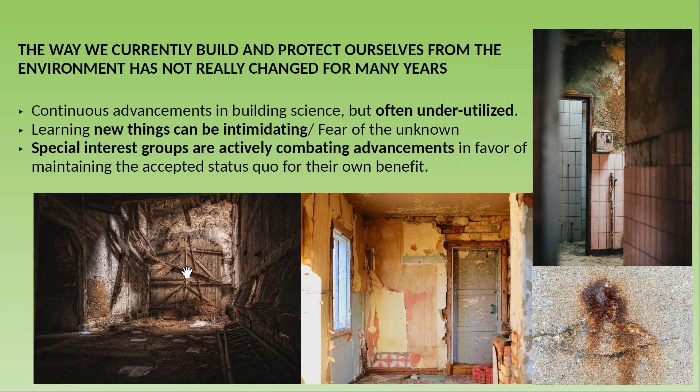This is something near and dear to me. When you think of where we build today, we build where it was once a forest or grasslands. And what do we do? We build with the exact same materials we just took from that environment. Then we expect those materials to survive when a forest fire or storm blows through. Same in coastal environments - we're building there, especially today with more storms and issues occurring, and we still keep rebuilding the same way. If you think of the most recent fire in Colorado, all houses built where it was once forest area, over 1,000 structures gone in 48 hours. So we have to change the way we do it and stop repeating this madness.

When we talk about the construction industry evolving, what we've really done is create tighter envelopes and more insulation values, but we really don't address toxic materials and flammable materials as much as we should. That's very evident in the issues we keep seeing. We're pushing 2x4 upgrades to 2x6 for better insulation values, which is great because it helps save on energy consumption - a big CO2 producer. But what we end up doing is adding basically 50% more fuel contribution to a fire, so there's more to burn, and we're taking down more trees. So again, we just continue that same madness.

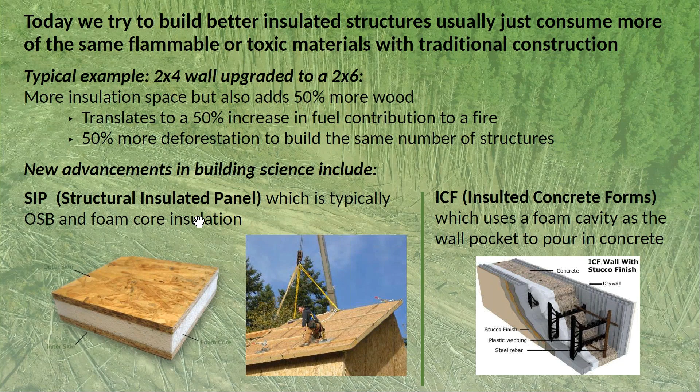So then we look at personal protection, and again, no real changes there. If you think back to Viking times, we used wood and steel to protect ourselves, then Middle Ages armor, and today we have metal shields. Not a whole lot has really changed in any of these industries. We've added Kevlar and aramid fabrics, but they're no good against armor-piercing rounds or edged weapons, etc. So we have to stop putting lipstick on the pig and really evolve into something for both building capabilities and personal protection capabilities that changes the way the industry focuses today.

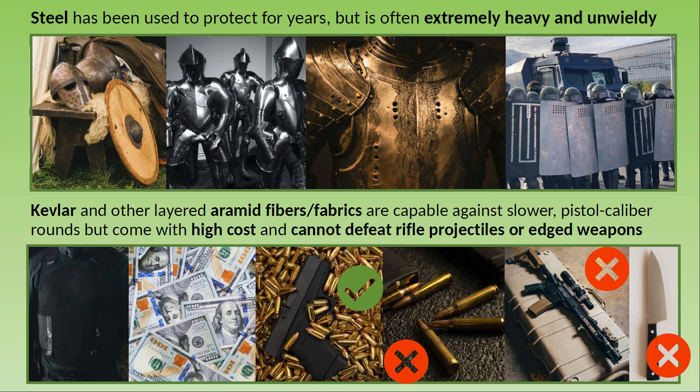So, talking about a new, efficient way to build along with ballistic protection - it has been developed, we have developed it. What you really want out there is a non-toxic environment. People don't want to live in a toxic environment, and many houses today have toxic materials in them. We also want a structure that survives Cat 4, Cat 5 hurricanes, survives seismic zone 4, no mold, no mildew, and works in all environments. We don't just focus on a cold or hot environment - we need insulation values in every environment, and the product can perform in all of them.

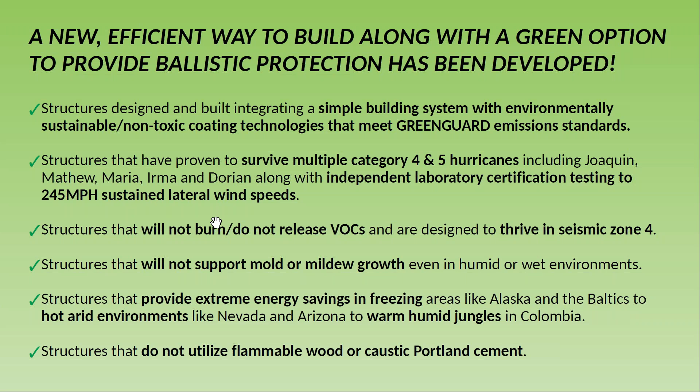So, a system which is faster to build and construct than wood or masonry - that's really what we have to look at today. With labor constraints in the marketplace and fewer trade schools today, meaning fewer people in the industry, we need a product that can be built with low-skilled labor, with high insulation values, and minimal brain freeze when it comes to laying out a house and getting it all set up. You're combining non-toxic ingredients with the strength of a structure that can survive a Cat 5 hurricane or a seismic zone 4.

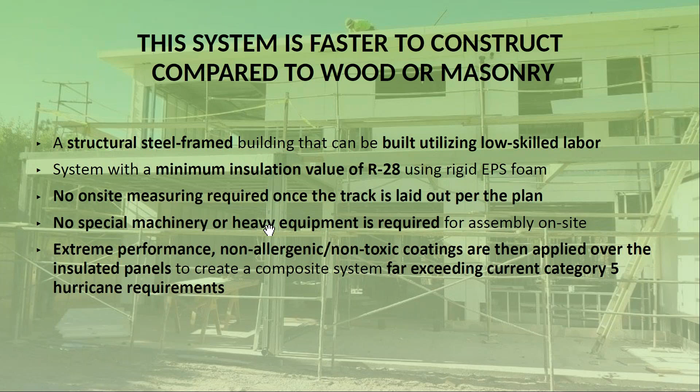If you take EPS foam, as we all know, like a polystyrene cup, if you have a polystyrene cup which is say 1/8 of an inch or less thick, it will keep your hand from a scalding hot drink, and it will also keep your hand from a very cold drink. So if you take 6 inches of EPS, all of a sudden you've got a phenomenal insulator.

And if you take that 6 inches of EPS and make it into standard sizes and standard shapes, it becomes very easy, basically like a Lego block, to build a structure. If you engineer it along with the right gauge steel studs and accessory holes within the panels, now you've got places for anchoring down to a foundation, running electrical chases, etc. It becomes very simple to build and doesn't require a high skill set.

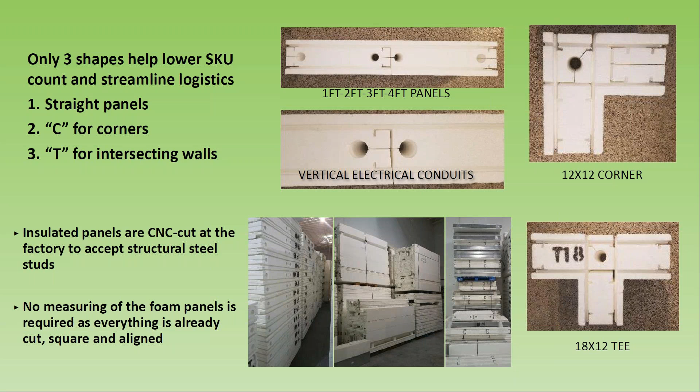What we try to do is lay out any structure, whether it's a house, commercial building, fast food restaurant, etc., with standard components. Here you can see how we take a structure and drop a corner into each section, and then drop a T. Top right-hand corner, you can see a 1 foot by 1 foot corner, which is 6 inches thick, giving you a 6 by 6 interior leg. Then you come across and see a T for an intersecting wall. So now you're not hunting around a job site for all different parts and pieces. There's one size T, one size corner, and then 4 foot, 3 foot, 2 foot, and 1 foot flat panels. It becomes very simple to design a structure and very simple to erect it.

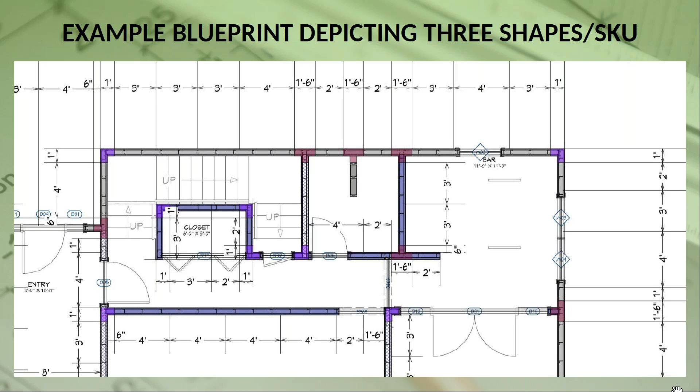It's basically, like I said, like Lego.

The foam shapes just drop over a bottom track, which is anchored to the ground and has a gasket on it. So the foam actually snugs up against the bottom of the slab or the edge foundation, and air infiltration is the big issue. By having a foam gasket and the foam coming all the way down, this really helps prevent that.

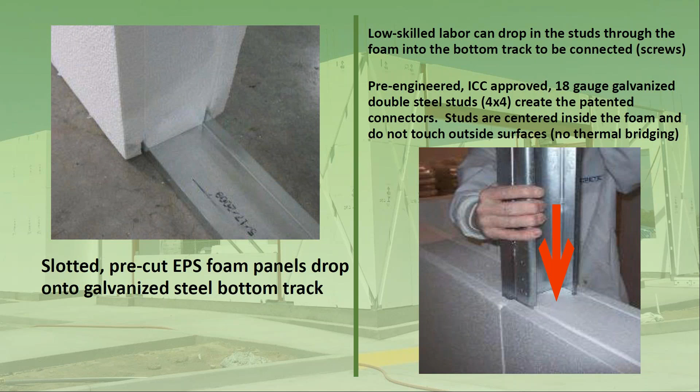And then we just take low skilled labor and drop a double stud connector connecting two foam panels together. As you can see there, that steel is not touching the outside at all—it is buried inside the actual panel itself.

Then what we got to look at is how do we anchor that structure down to that slab. The simplest way to do that is just take a piece of all-thread on a coupling nut on a bolt that is already in the foundation at a predetermined place, and then we crank it down. We take a bracket off of that top, put the whole unit in compression, and bolt that to the roof. When we do that, we've got a structure which can survive a Cat 5 hurricane.

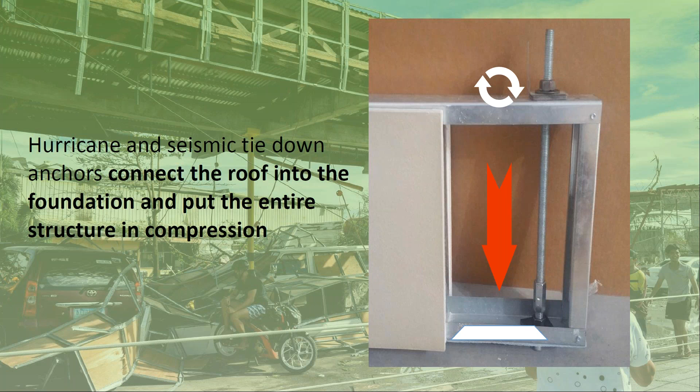When we look at that type of structure and efficiency, you can see here a really good cross section showing how foam buried within gives you a 50 to 60% energy savings. If you look at the US Department of Energy chart on the right-hand side, a typical home today, 2x4 construction R13, falls in a band of around 100. A typical energy efficient home using 50% more lumber, meaning 2x6 R20, actually falls in the 70 to 77 range. A structure built with this type of methodology falls in a range of 2.

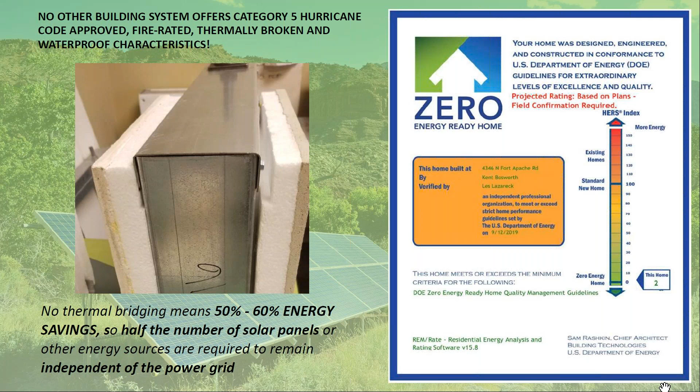So the energy used to heat, cool, and power is greatly reduced, which obviously is a big savings—a savings when it comes to the carbon footprint that a house puts off.

Everybody asks the typical question: well, how would you run plumbing? How would you run electrical? Again, all very simple. For plumbing, just using a hot wire knife, you bend it around the plumbing, whether it's hot, cold, or vent pipe, and literally just melt the foam away. Put the plumbing in, and now all you've got to do is spray foam over it. So your hot is insulated in the wall, your cold is insulated in the wall—your plumbing doesn't get hot in the summer, doesn't freeze in the winter.

For electrical, the same hot wire knife just cuts out for a box, and that box aligns perfectly with those holes you can see alongside each stud. So no matter where you are in a structure, there is a location to run electrical wiring.

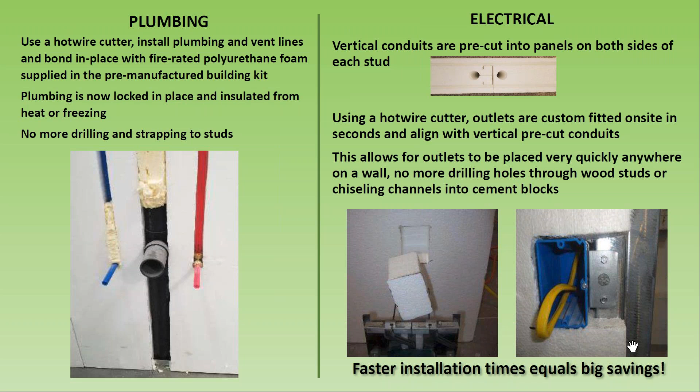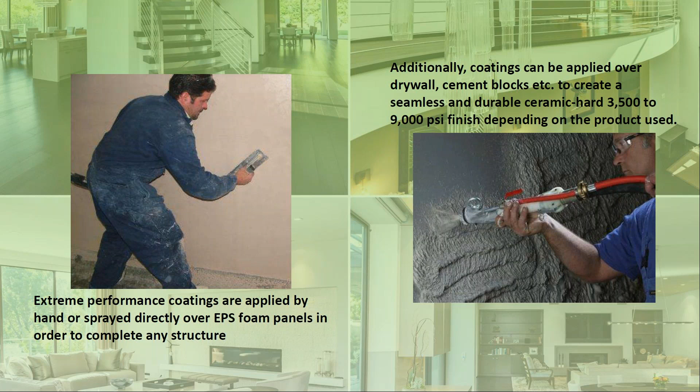So once that is all flat, shaved off and nice and smooth, the simplest thing to do is put an extreme performance coating over the top. By applying this, we don't have mold or mildew to worry about, and we have a seamless finish throughout the entire structure. The product could be sprayed or hand troweled, so it's very simple to apply. In fact, even homeowners have applied these types of coatings, so it's not a difficult process.

Continuous testing is also important. When you look at testing, code approvals, and things that are going to last in the environment, you have to do continual testing. Whether that's heat testing to make sure the material doesn't expand and contract, like 193 degrees on surface temperature in the top left-hand corner, to water intrusion by building a water column test with water sitting on the surface of a coating to see how long it would take to penetrate. These types of things are incredibly important.

Testing against salt water and salt air is important, because that is incredibly corrosive against all materials. Direct flame with no smoke and no off-gassing is also incredibly important, getting to high temperatures as you can see there, 1,787 degrees Fahrenheit. So these types of things in continual testing are incredibly important when you want a product in the marketplace that is going to perform for a very, very long period of time.

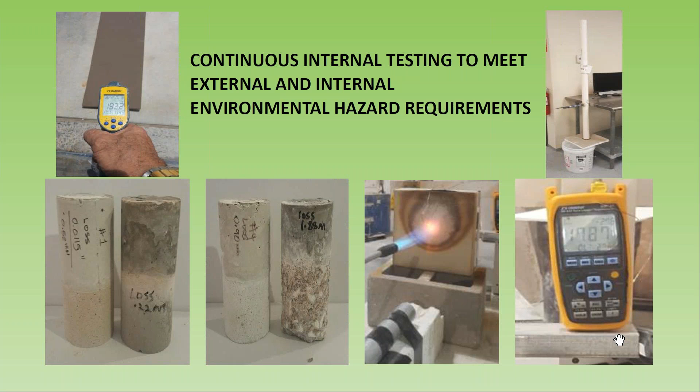So with StuccoMax, when you look at a structure, you saw the foam and the steel studs that are all in place. Then we have to start looking at how do we encapsulate it, so that testing I just spoke about is incredibly important. You need a high performance coating on the exterior.

Today, in the world of stuccos, you have your typical 3-coat stucco and your synthetics. They don't keep water out, and there's multiple lawsuits for mold, mildew, etc. You need high impact resistance, something that is literally going to stand the test of time, whether it's in the islands or in a freezing environment.

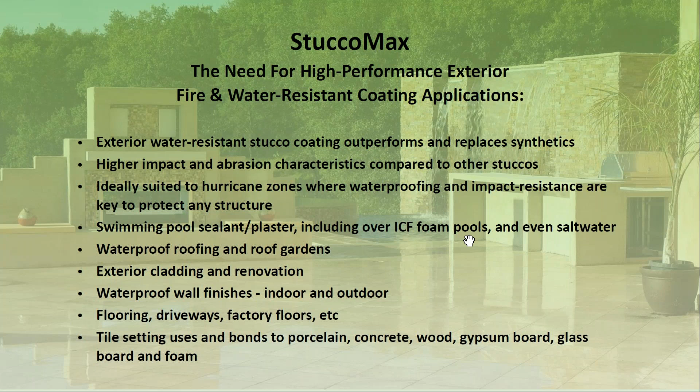You also need an interior fire rated product. I'm going to bounce through some of these because of time, but you need a fire rated product for the interior, and we've developed a product called PlasterMax, which is all natural with zero VOCs, perfect for the interior finish of any structure.

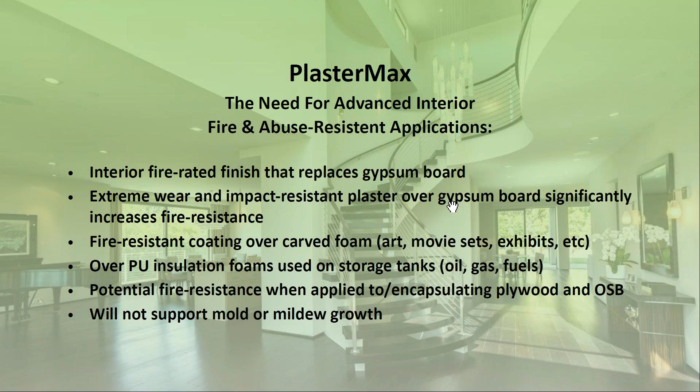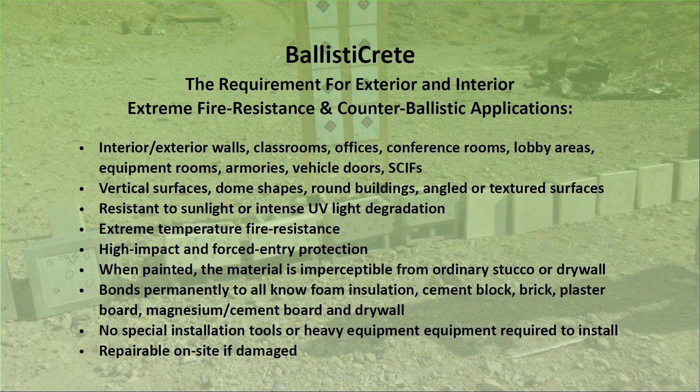And then next, coating BallistiCrete. We developed a bulletproof plaster that can be applied over any surface, block, cement, walls, drywall, etc., that could stop really pretty much anything you could throw at it. We've even done blast testing.

You can see here a few pictures of coating over drywall, coating over CMU block, and coating over different types of finishes. We've gone all the way from 12 gauge slug to tungsten penetrating rounds. In fact, we did test a 308 tungsten penetrating round over a hollow block and actually broke the bullet in half. The people witnessing that, including Seth, were amazed that we were actually breaking tungsten bullets apart. And it's incredibly cost effective.

People just believe you're applying a plaster over a surface and doing an interior upgrade, when the reality is you're providing high level ballistic and fire rated protection.

Same materials can be blended together and actually cast to make stackable blocks. So now we can have a stackable block for different fighting positions, FOBs, etc., around the world. Once you're finished using it, you take it down, stack it back on a pallet, and take it with you. You're not leaving things behind for anybody anywhere in the world.

It can go on grass, sand, concrete, any type of finish. Level it out, stack it, and you're ready to go very quickly.

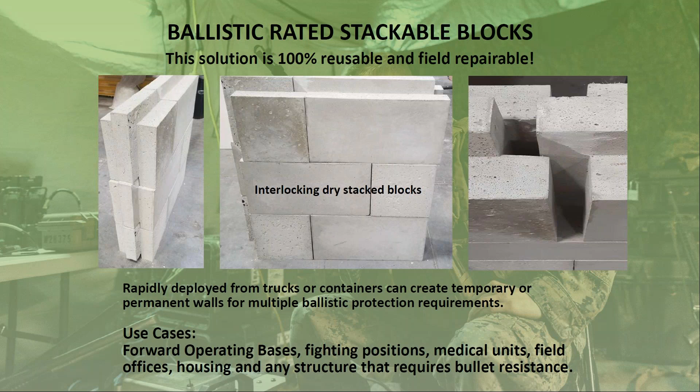This is interesting. We've also done radio frequency testing, high and low level, and we're able to take our product and manufacture it to look like anything in nature. As you can see here, it can look like an old tree, or we can make it look like a rusty box, a brick, a log, anything. We can make the coatings look like anything out there today, which is useful for leave-behinds and things along those lines.

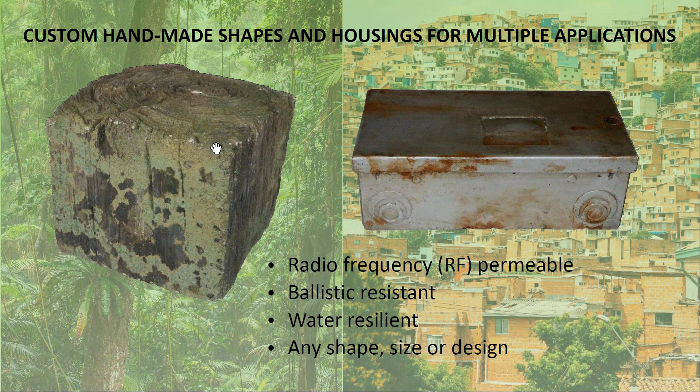Blast testing has been done. I'm not the best one to talk about blast, but we have done blast testing and continue to do more shortly. We took a 4 foot by 4 foot panel and put 3 separate charges on it, and there was no area for a breach into a structure. So we can take any existing structure and really upgrade it for fire resistance and blast capabilities.

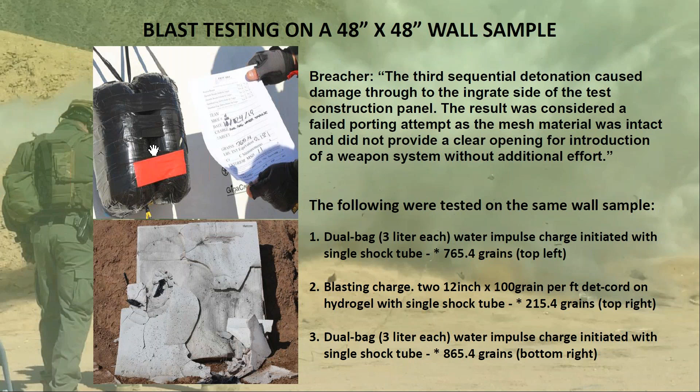Like I mentioned earlier, testing is incredibly important, so making sure you can back up everything you say is what we try to stand behind. With Miami-Dade NOA, we outperformed anything they've ever tested - abuse resistance, adhesion, mold and mildew, all those things are important. We even had certifications where we took a hollow CMU block with 1 inch of material and tested it to NIJ level 4, which is a 30-06 armor piercing round.

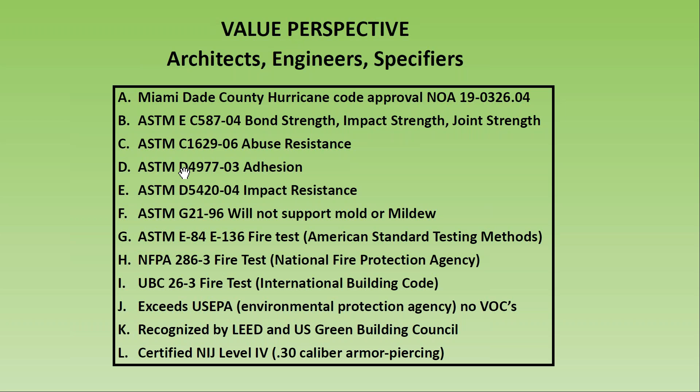All right, I was given 20 minutes, and I think I went 19 minutes and 20 seconds, so I moved through it as fast as I possibly could. I certainly hope it was educational enough to give you an understanding of the flavor of what it is we do. If you have questions, we're open to answer some now as time permits, but you can also see our email addresses so we can be reached with questions on anything we provide. Thank you.

No, thank you very much, Michael. That was very thorough, and it looks like we've got plenty of time for questions. I'll open it up to the group, but I definitely have a couple of questions about it. So...

Michael Bartamy, I'm with GigaCrete, I'm with the consortium. Can you explain to them about that house in California that the wildfires destroyed all the houses but for the one in GigaCrete?